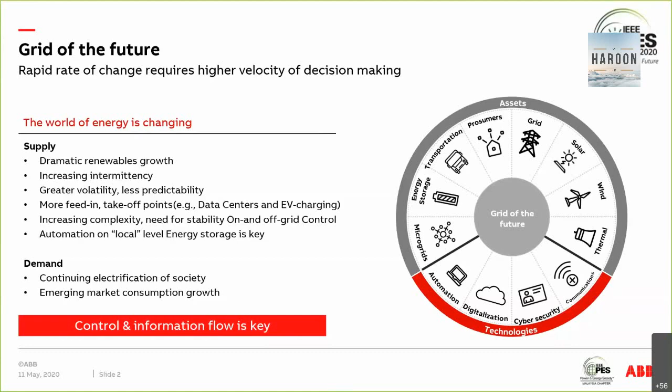In the past, it was okay for us because we knew that the load profiles were well known and stable. Nowadays, the load profiles are totally undefined and power flow is constantly changing depending on the demand of energy. So today, we need information in real time. We cannot operate on historical data. The grid is changing rapidly. That is why digitalization of the entire grid, and especially transformers, is very important. It is becoming more and more crucial.

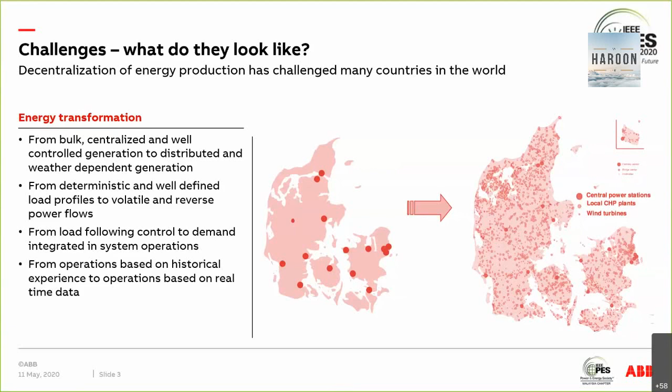In summary, the grid is already seeing a significant change on the generation side, but we are now going to experience an even more uphill battle on the demand side. That is why we need insight into the impacts of these changes. That is why my focus is on transformers, because ultimately, whether it's distributed generation, EV charging, or data centers, all of them are putting pressure on the transformer. And not only the big power transformers, the distribution transformers as well.

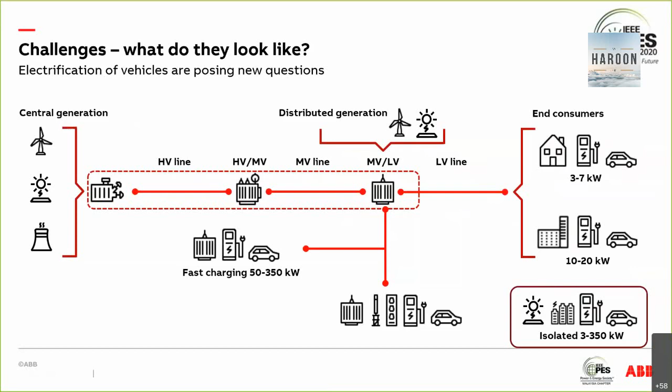Ideally, when you buy a transformer, you would want it to last for 30, 40, whatever number of years is the requirement. And that was calculated based on economics, based on the operational stress. So it was well defined.

But now, what is happening is the stress on the transformer is becoming unpredictable. Sometimes there may be some extreme weather event, system fault, emergency overloading, increased harmonics, as I mentioned before, or a switching event which will cause unplanned outages. Unplanned outages are very, very costly and result in significant downtime. This is something which we are trying to avoid.

In order to avoid unexpected failure, we need more reliable systems and information about the health condition of those assets, particularly transformers. And that is why we need real-time control, real-time data, and be able to do things like cooling control, fans which operate automatically, all of that, to make sure that the transformers cope with all these changes.

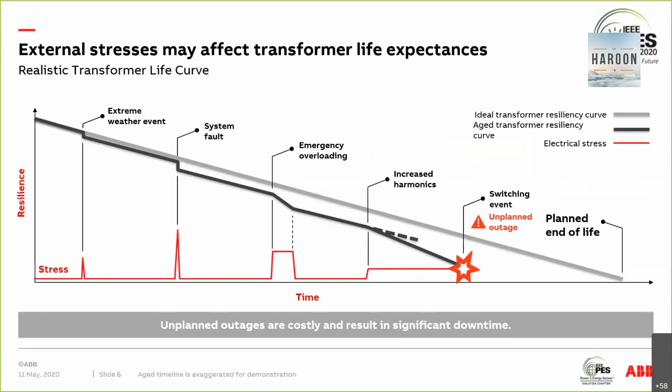Now, as asset managers, we face a lot of challenges. I already spoke about the challenges, EV penetration. A lot of the old experienced staff members are retiring. Transformers which are old; in my recent visit to Japan, I saw a transformer from 1962. They are still running. The increased demand for reliability, business model disruption.

This example I'm giving is from a startup called Volta, which offered free EV charging in exchange for advertising at very high value locations. This was never considered by the utility when they designed the electrical assets in that area. But now things are changing, so we need to avoid risk.

It is not acceptable if we just manage risk. We have to do it at a cost where we minimize the cost rather than optimize the cost. And of course, everyone expects us to exceed performance, not just meet performance. And to do all of this, we need data, we need visibility. So the bottom line is we need sensors, right from the bottom, from multiple transformers, from hundreds of transformers, all connected together so that we can see what is going on.

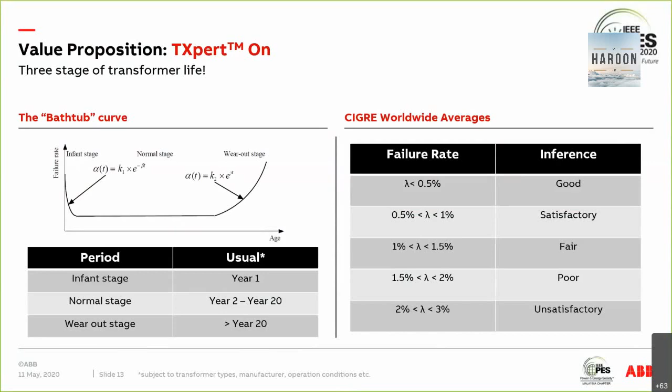I'm pretty sure all of you are familiar with the transformer bathtub curve. We have the infant stage, the normal stage, and the wear-out stage. CIGRE has done some statistics on the failure rate. 1% is assumed to be a fair failure rate. So we used that 1% to do some calculations. Within that 1% failure rate, with your existing protection devices, you can save around 30%, whereas 70% is not detectable. Within that 70%, 10% will result in catastrophic failure, like fire, whereas 90% are non-catastrophic.

The whole idea is, if you have the data, the early detection digitalization gives you, you may end up spending repair cost for early detection, but if it goes on too long and becomes a non-catastrophic failure, the cost will go up by 7.5 times. And if it becomes a catastrophic failure, the cost goes up by 25 times. This is what we are trying to bring down, because now you see what is going on inside the transformer. With a catastrophic failure, apart from environmental damage and government penalties, damage to reputation is very important. That is something we can all avoid if we have the data, if we have the visibility.

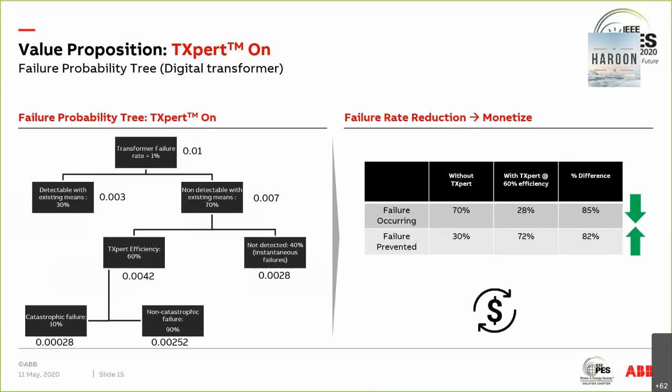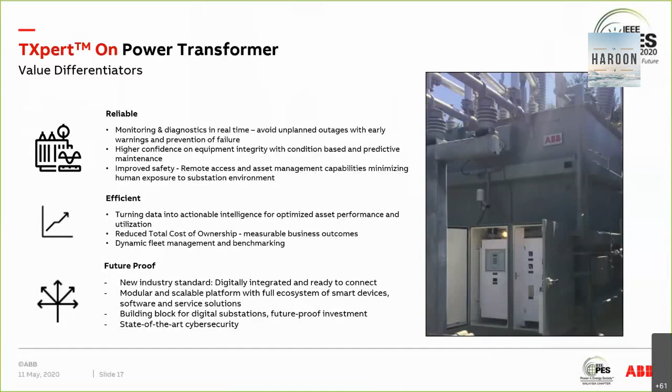So what is a power digital transformer? It's the building block for your digital substation. If you want to have a digital substation, the transformer is probably one of the costliest items in that substation. And if you have a digital power transformer which gives you solid data, it helps a lot. It has to be a modular and scalable platform so that you can keep on adding a lot of stuff to the digital power transformer.

Monitoring and diagnostics definitely help in real time. It will help you to avoid unplanned outages. Higher confidence in the integrity of the equipment, because you are now getting the data back from all those sensors. Improved safety, because you can reduce human exposure to the substation environment. And fleet management is something which we all want to do. We all want to have a nice view of what is happening in our fleet.

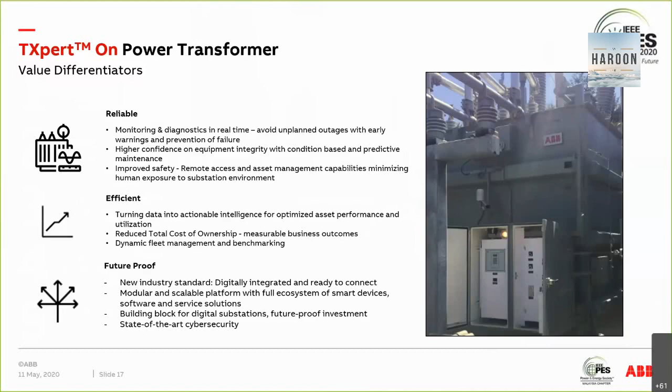So to do that, we have introduced the digital power transformer TXpert on power. The standard solution comes with an electronic temperature monitoring with top oil and winding temperature information, load information. All the measurements are in this ETM, which we call the CoreTec 4. CoreTec 4 allows scalability, and it also allows customization in line with what the individual customer requires.

Sometimes you may want to add an online DGA device, you may want to add an electronic breather. All those conventional devices which are there in today's transformers can be converted to have an electronic output which comes to this brain of the transformer, and it starts giving you real-time data. And apart from that, we can do monitoring and diagnostics, and the digital solution can be upgraded or retrofitted if need be.

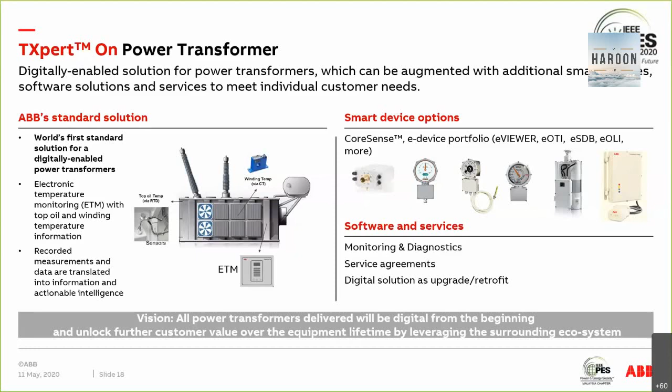In the standard offer, we just introduce the CoreTec 4, and we use CoreTec 4 to do top oil and load measurements. And then we have all the IEC 60076 algorithms already inbuilt into the CoreTec 4. So each CoreTec 4 will represent one transformer with its own particular characteristics. When we make the transformer in the factory, we know how much oil we have used, how much winding material, what is the weight of the winding material, how much paper we have used, what is the weight of the tank. All of that data is already there in the factory.

All that data is now used to feed information to the CoreTec 4. So the CoreTec 4 becomes like the brain for each power transformer. And if you go for the next level, we add sensors. If you go for the highest level, we add a lot of other devices, protection devices, all of them talking to the CoreTec 4. So my main focus today is to talk about what the CoreTec 4 is.

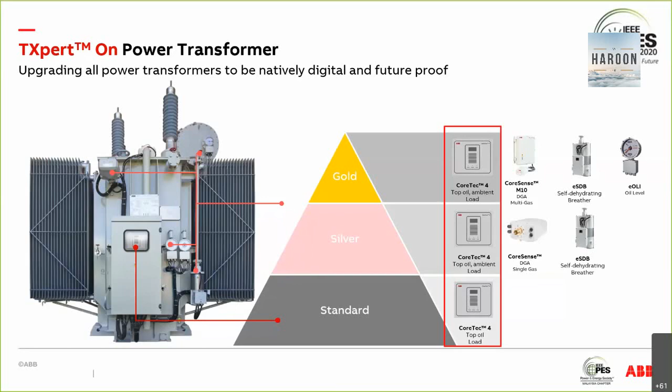The CoreTec 4 is a very modular transformer monitoring system. It is designed to collect, aggregate, manage, and analyze data for one transformer. If you have 50 transformers, you will have 50 CoreTech 4s, all of them talking to APM. CoreTec 4 basically monitors top oil temperature, dissolved gases, load, tap changer monitoring, bushing monitoring, and all the other devices. And it models and stores data for hotspot temperature, aging rate, overload capability. It also can control the cooling fans to maintain the temperatures within set limits.

We have tried to keep it as simple as possible. And you can see cooling control. It can talk to your SCADA system. We have given fiber and Ethernet options, USB options to download data. You can connect your CTs, connect your top oil sensor, all of that.

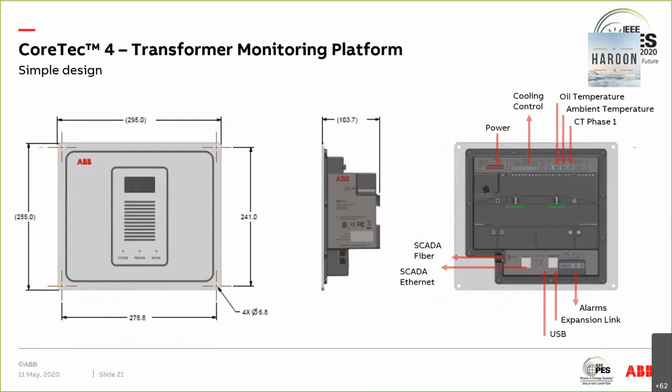The CoreTec 4 we have designed to function from 100 volts to around 240 volts AC, both for 50 and 60 hertz systems. We have tested it from minus 40 degrees to plus 60 degrees so that it can be used all over the world for different operating humidity conditions.

Basic idea is we take the top oil temperature, we take the load data, and then we use the IEC algorithms to calculate what is the winding hotspot, what is the aging rate, what is the loss of life of the transformer. So basically in every 24 hours, the CoreTec 4 will calculate how many hours out of those 24 hours you have used. And then it will keep on adding up every single day, every year, and you will get a very nice feel of how much you have used the transformer.

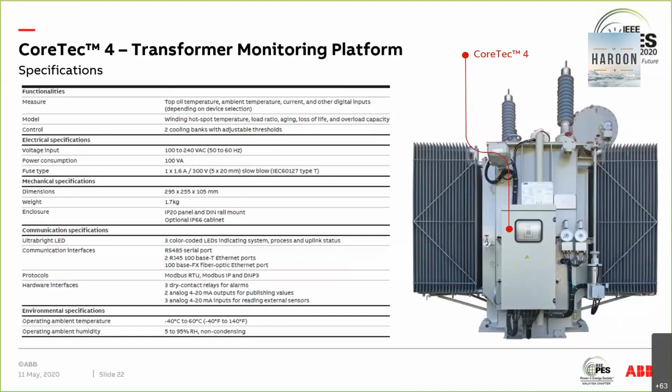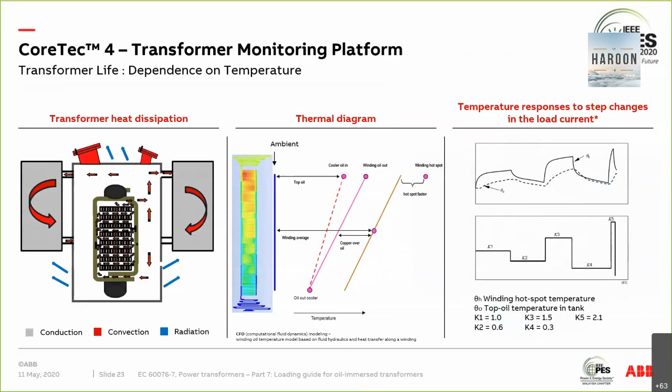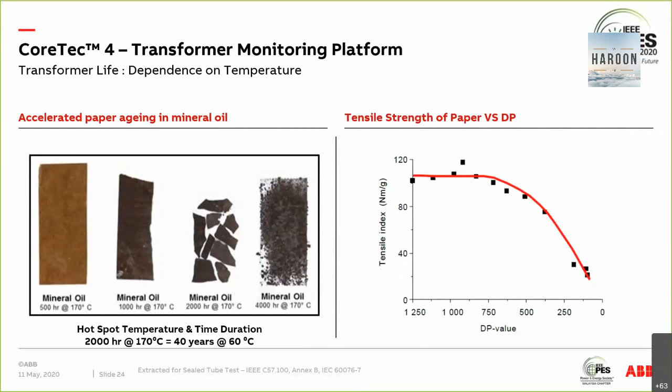What we are trying to calculate is, once you have the online DGA sensor with the moisture figures, with the temperature, we're trying to find out how long it takes to fall to 200 DP. I think all of you know that the end of life of a transformer is considered to be around 200. That is something we are trying to calculate in the CoreTec 4.

And we know temperature is never constant, so we have uploaded the entire IEC thermal model. And as I mentioned before, all the transformer specific characteristics are now part of the brain. And that is how we calculate a lot of different features for all of you.

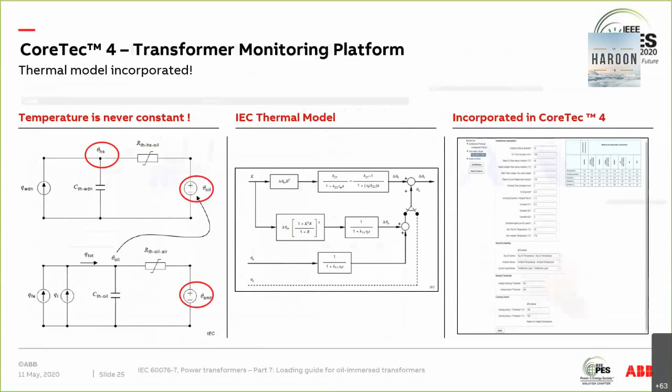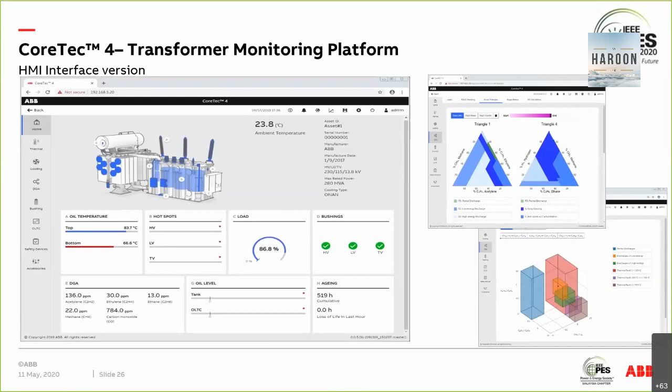This is the point solution which we are offering to all our customers at the transformer level. Then we migrate to the fleet level. So what is the CoreTec 4? I'll give you an example.

So the question, can I load my transformer to 100%, is answered. You now do not need to ask anyone. The transformer itself is telling you, yes, you can.

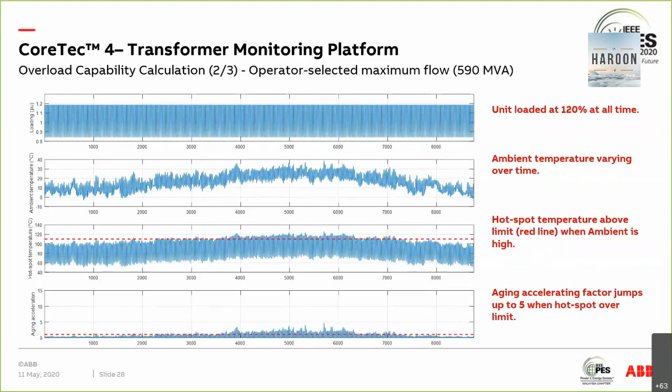So now, when this happens, immediately use CoreTec 4's cooling control function to start the fan so that we can keep the hotspot close to the limit all the time. And then with intelligent loading, the acceleration factor is acceptable to us. So this is something which the CoreTec 4 will provide, the data to the asset manager to inform decisions. So this is one of the use cases of CoreTec 4.

Another case I would like to present is that an aluminium company hired us to supply a solution to increase the capacity of their installation by 15%. And they wanted to retrofit their existing transformers and get a payback period of 3 years. So what we did, we first went and did a feasibility study based on the condition of the transformer and risk associated with the equipment. Some minor repairs were needed, and then we decided we would install the CoreTec 4 and the DGA device. The customer also asked us to provide remote support and quarterly reports.

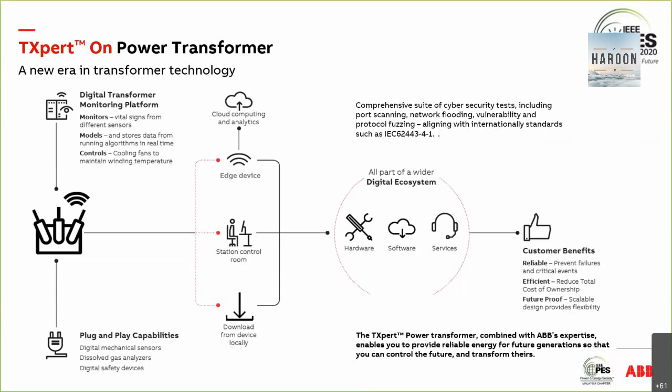And then you can have multiple digital power transformers connected to the station room where we can do cloud computing and analytics. This is something which the TXpert power transformer combined with ABB's expertise enables you to do. I will now move on to the next level, which is TXpert enabled APM Edge software.

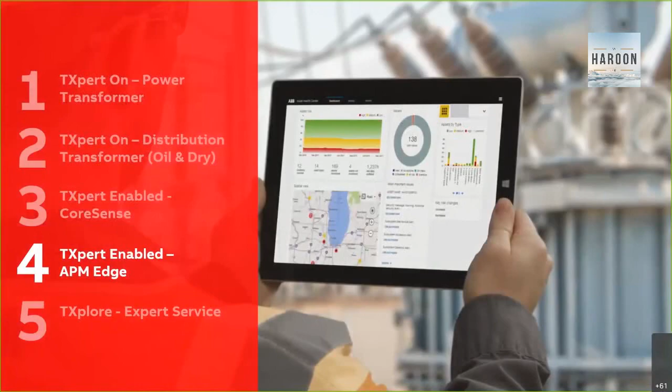Within the ABB power grids, our digitalization journey is very, very simple. We start at the bottom, we start at the transformer where we are ensuring that we have the right level of sensing. We can connect. Once we are able to connect, we are ensuring that the transformer is remotely manageable, which helps customers to bring business agility. And on top of it, we have developed the expert services based on these capabilities, and eventually to give the visibility which is obtained from the sensors, and that's how you are better able to manage your fleet.

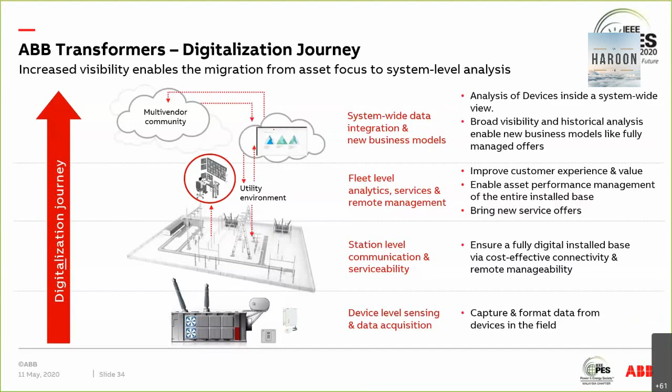So what is the APM Edge? Once you connect, once you collect, you are sending the data to the software. We have done a lot of statistical modeling and a lot of other algorithms inside the software. And once the software does its calculation, we inform the customer what needs to be done. We tell them when you need to do it. We give you maintenance scores. We give you replacement scores. We give you the risk associated with operating the transformer.

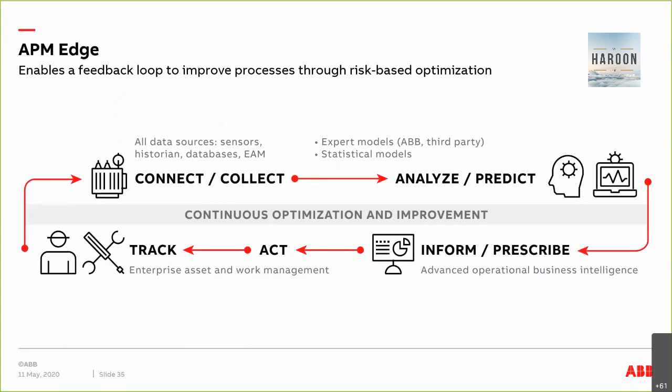And it's basically like a closed loop. So once you start sending the data, we analyze, we inform, we ask you to do something, you take some actions, you report it back to the software, and it's a continuous cycle. The whole idea is we are now moving from time-based to condition-based management. So from time to condition to reliability-centered management. Earlier time-based, everyone knows what is time-based. We plan according to time intervals, and we do maintenance sometimes even if it is not required.

Then we move to condition-based, where we plan our maintenance based on the actual measured condition of the components. What is the criticality? What is the impact of failure? All of these are not considered during the planning. Now we are moving towards reliability-centered maintenance. The whole idea is we plan according to the risk profile of the critical components. We determine the component health and its impact on the transformer. Based on that, we act.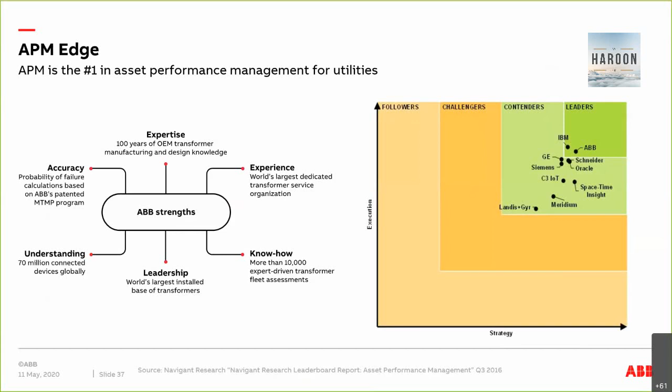Listen to solve your problems. We get questions such as, I want to identify my data trends to reduce my maintenance activities. I want to understand what happens when we overload our transformers. I want expert suggestions. I want to compare multiple transformers. A lot of these questions we always get, and the idea is we use the software which will help the transformer experts

to do fleet assessment. The whole idea is, with a lot of data coming in, the transformer experts will be overwhelmed with so much data coming in from so many different sources. So the software is just like a helper to the transformer expert to do some data cleaning, to do some data filtering, all of that which is done by statistical models which we have implemented in the software.

It is the most cost-effective entry to the industry. I mean, it's very, very simple. You can see the risk matrix, you can see the risk trend. We need a lot of data. APM is very, very data hungry. I will show you what I mean by that.

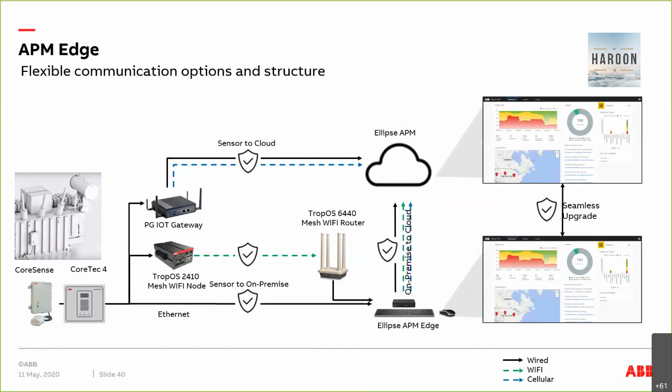What we offer to you is fleet level analytics, DGA analysis, offline. For online, we take care of 13 different manufacturers from ABB. We have algorithms developed for each and every one of 13 different manufacturers. You can have ABB's CoreSense, you can have Transfix, Calisto, Hydran. We have algorithms for each one of that.

Then we also do thermal analysis. We do a lot of different parameter analysis, power factors, bushing power factor, capacitance, standard oil test. And once we have all those data, we calculate the probability of failure and we determine what is the risk of the transformer. And then based on that, the software gives you expert recommendations.

These expert recommendations are based on the fleet assessment done by more than 1,200 ABB engineers on more than 10,000 transformers. So they have done the condition assessment, they have given reports, all their expertise is now part of the software.

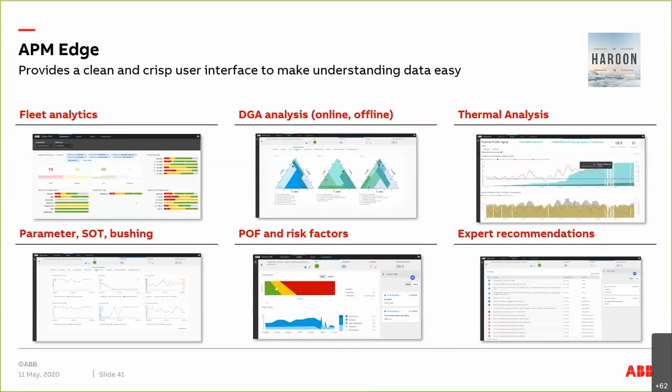What we're doing, it needs data. There are some mandatory data: nameplate, factory test report, drawing data, all of that. If you have online DGA sensors, we put in the DGA sensors, and then inspection data like the DGA test results, visual inspection results. No other software will ask you if you have corrosion in your tank, what is the risk of failure to my transformer?

So we have taken care of paint flaking, corrosion, bushing, dirty bushing, cracked shed, all those things we have taken care of. Small, minute things which can help in the transformer failure. And for us, everything is important. Whether it's bad DGA or good DGA is equally important as, say, the foundation of the transformer.

If the foundation is not correct, if there is tilting, we have given importance to everything. We have not prioritized. Everything is important. Everything contributes to transformer failure, and that is how we have developed our algorithm.

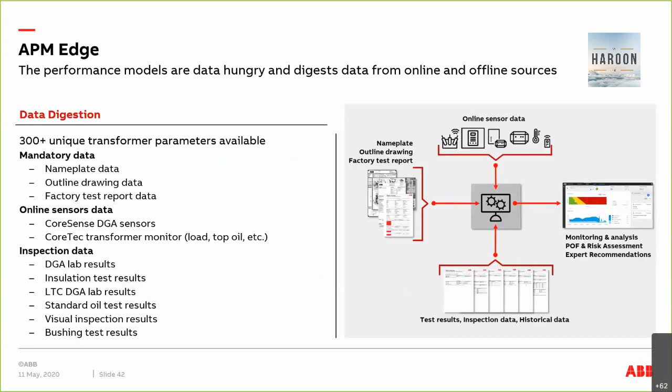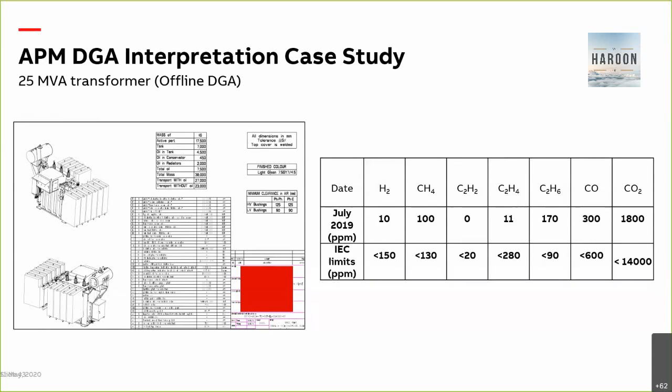I'll give you a quick example of DGA interpretation. So we had a transformer where we got offline DGA data, and then we got the lab test results. And what we did is we checked against the normal IEC limits. The lab gave us this answer saying that we have a problem, the DGA indicates there is a thermal fault, and all it did was recommend further monitoring to establish trend and resample in 6 months time.

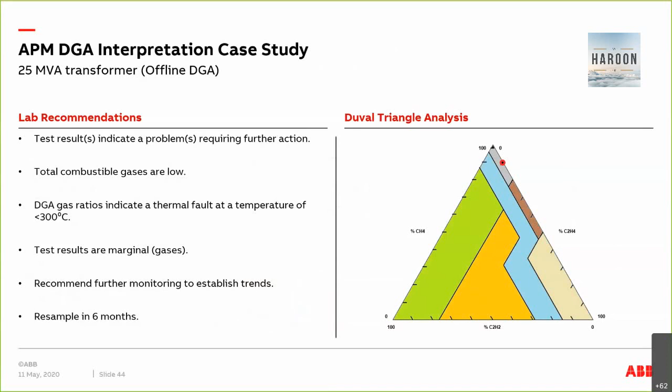So we told the customer, let us put this data in the software, and then we will tell you if our recommendation is different from that of the lab. So the first thing we did is we took 4 data sets from 2016, 17, 18, and 19, and then we uploaded it in the software. And you can see the ethane gas levels have gone up considerably.

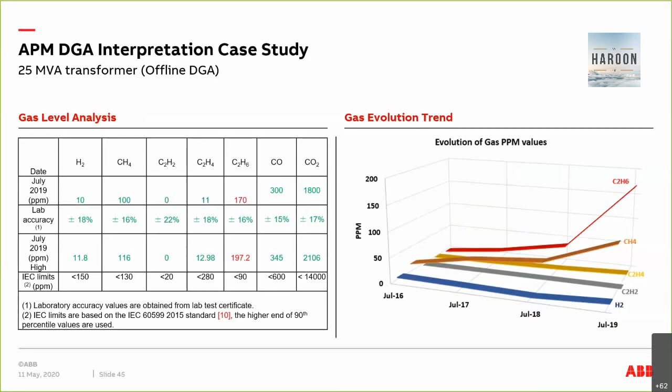So once we put in this data, what it said is that this ethane gas is a statistical outlier because we are seeing almost 447% increase from the previous level. And the expert system straight away recommended that it may be a mistake in the input data, it may be something to do with the sampling, sample contamination, and it recommended please double check. That recommendation we passed on to the customer and said, please double check, please redo your offline DGA.

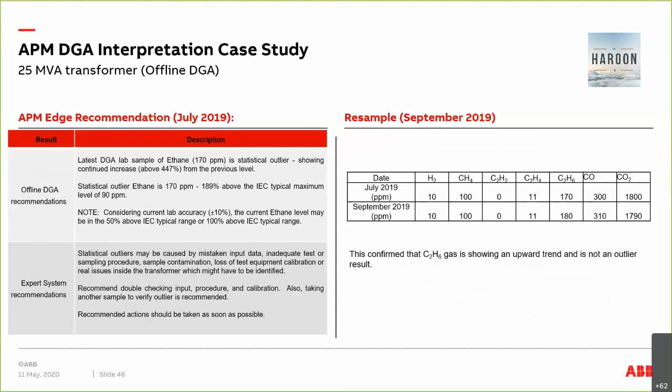And they came back and said, okay, they did the test in 2019, and this confirmed that the gas is actually going up and the result is not an outlier. We re-uploaded the confirmation sample, and what the software recommended is that yes, it is actually above 50% of the IEC gas levels, and based on the full samples, we are showing an increasing rate of 60 ppm per year.

And it also said that if this trend is maintained, within 1 month we will cross the 100% IEC concentration level. And the expert system says that the hot metal gases are there. Fault temperature is calculated around 156 degrees. You need to check contact resistance. You need to do some tests. So the expert system clearly identified that the gas is coming from localized overheating, and it also calculated the risk associated with that particular cause.

And it said the risk is low for that particular DGA result. But the rate of rise was on the higher side of 60 ppm per year, which was based on linear trending of the 5 manual data sets. So based on that, we knew that we need to monitor.

So we put in an online DGA monitor to verify whether what the software said of IEC ethane gas levels going up within 1 month's time is correct or not. And we installed an online DGA device.

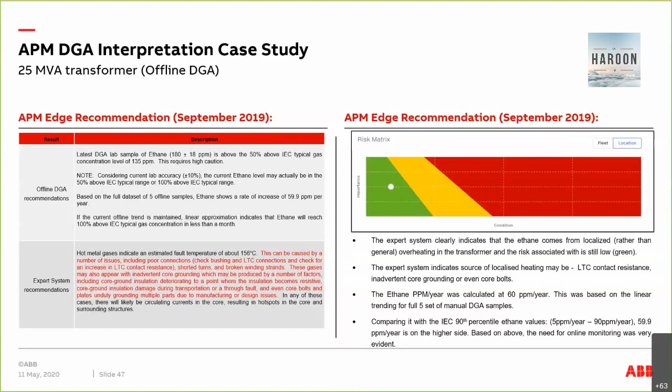So that is how we were able to do trending of the offline DGA samples, and based on that we told the customer that you will cross around 250 ppm in May 2020. And then the shutdown was planned in June to investigate based on what APM recommended. So once the lockdown in Singapore is over, I will try to find out whether the customer will shut down the transformer or not.

But to tell the customer in September, in 1 month's time you will cross this, in 6 months' time you will cross this, so you better plan your maintenance at this point of time. And we also told him these are the things which you need to look for inside the transformer. This is the power of the software.

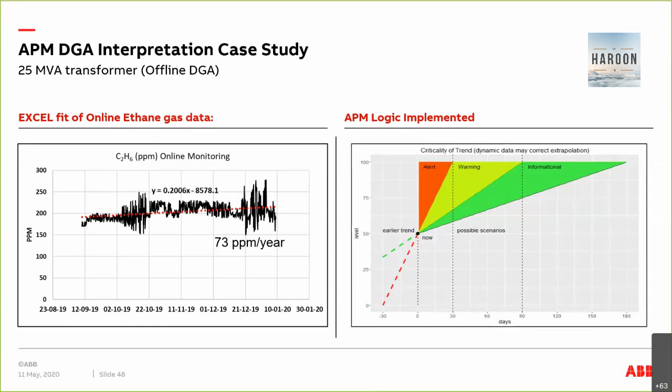This is the rate of rise. These are the sources of local heating. Please do winding resistance, insulation resistance. We told the customer what he needs to do. That is the power behind the expert system and the software when you compare it against the lab.

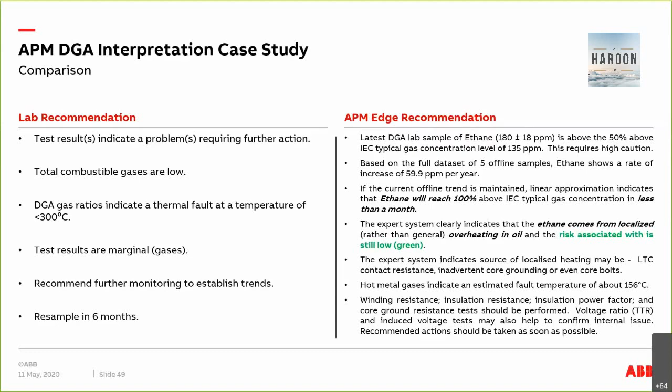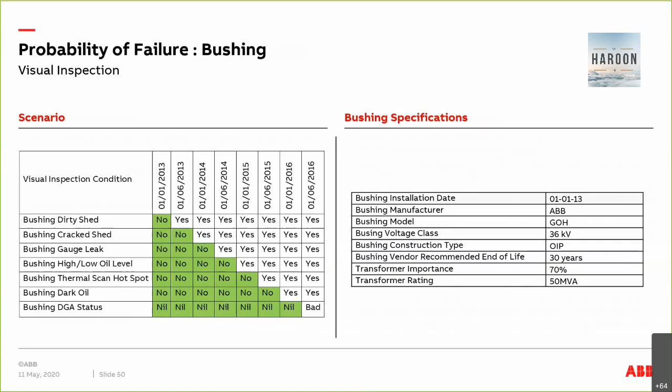Then I do a thermal hotspot and say, okay, I can see high temperature, oil has gone bad, DGA status has gone bad. And what happens when I upload this data to the software? It says when you start in 2013, everything is fine, your risk is low, you are in the green zone. Once you start uploading the data, you can see the risk trend to your right.

The risk has increased from 0.2% to 2.25%, and it has shifted from green to yellow zone. That means now you are in the medium risk category. If we compare it with the traditional 1% failure rate, we are moving towards the traditional 1% failure rate.

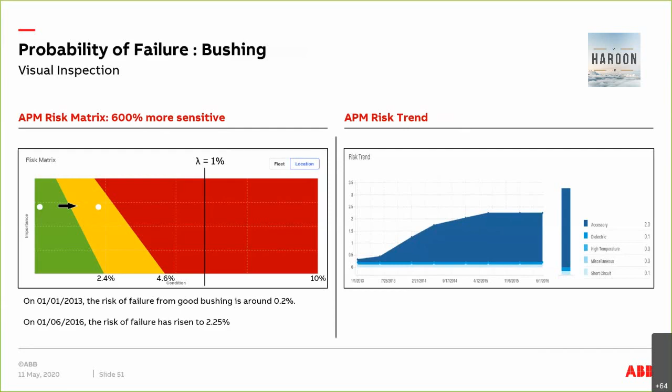So what we have done in APM, instead of a linear method, we have used a non-linear method to do the calculation. And we have made the system much more sensitive to each and every individual component in the transformer. I will give you a quick example on health index. We are all very familiar with the traditional health index computation.

I'm sure you must have seen this calculation method where we take around 24 different conditions of the transformer. We assign scores based on what we see or what we think should be the score. If you put in 0 for the bushing and 4, which is the highest score, for everything else, you will see that the traditional health index method is giving you a score of 96.88, which means the transformer is fantastic.

I mean, a 96.88 score condition is very good. We expect transformers to last for more than 15 years, which is not the case because the bushing will take the transformer down. That is how we have increased the sensitivity of the traditional health index method in our software.

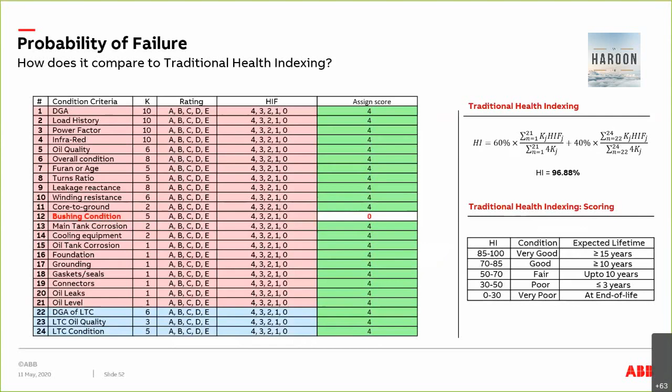All the standards which are built into the expert model, whether it's IEEE, IEC or CIGRE, we have DGA samples. I mean, we have lots and lots of DGA samples based on which we have developed all our algorithms. The software takes around 300 different data parameters. We calculate the probability of failure of each and every single transformer component and then aggregate it to give you a transformer failure component based on all those subsystems.

This is based on ABB's MTMP program, which we have done for many years. We have done condition assessment for more than 10,000 transformers only in North America, USA, and Canada. So far, we have 14 algorithms. These algorithms consist of moisture analysis, oil test, DGA, thermal profiling, furans, and we are in the process of incorporating many more.

Finally, for full-scale implementation, we need data. We can start with the nameplate. We can start with the basic DGA data. But if you start giving this model more and more data, the whole digital transformer ecosystem will start giving you much better results.